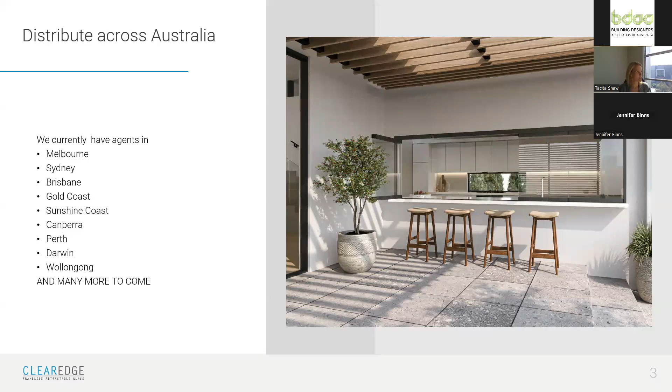So what is the ClearEdge frameless system? It's a frameless glass movable system suitable for both residential and commercial applications. It's made up of individual frameless panels, and each panel operates independently of the other.

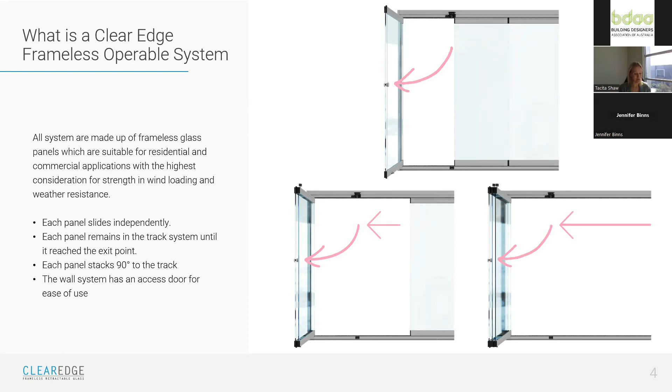The first panel swings open. This will be on the extreme left or right of the system, and this panel can be used as a standard access door if needed. Then the next panel slides along, remaining in the track until it reaches the exit point. It then pivots out and stacks at 90 degrees to the track.

The ClearEdge system is designed with the highest consideration for both strength in wind loading and weather resistance. Number one is our weather seal. It's made from a UV stable clear polymer, cleverly designed in an H shape with a soft inner lip. This holds to one panel while receiving the other in a tight seal.

Number two is interlocking end caps. Each panel has a female and male end cap which interlock, giving the system integral strength under wind load pressure. The glass is mechanically fitted, and number four, you can see our double rollers. Each panel is hung by two double rollers with sealed bearings.

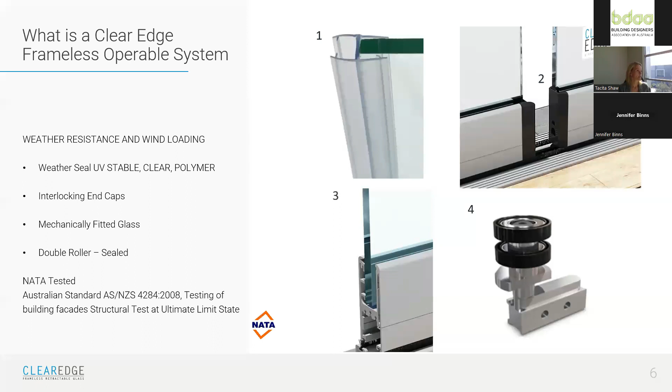So what product options do we have? Firstly, our standard system. The application is for residential outdoor enclosures, weather barriers, and low wind load areas. It utilizes 10mm toughened safety glass with a number of options within that range. The maximum height is 2.6 meters, the maximum width is unlimited, and each glass panel can be a maximum of 850 millimeters.

The next system is our premium system. It can be used as external and internal walls and doors, also as weather barriers on multi-story buildings, in commercial internal and external applications, and in high wind load areas. It utilises 12mm toughened safety glass, again with a range of options. The maximum height is 3 meters, width is unlimited, and panel width is about 850mm.

Finally, our ultimate system, used in cyclonic wind areas, on high-rise buildings, and in commercial internal and external applications. This uses a very thick 15mm toughened safety glass. The height can go up to 3.2 meters with unlimited width and about 800mm wide per panel.

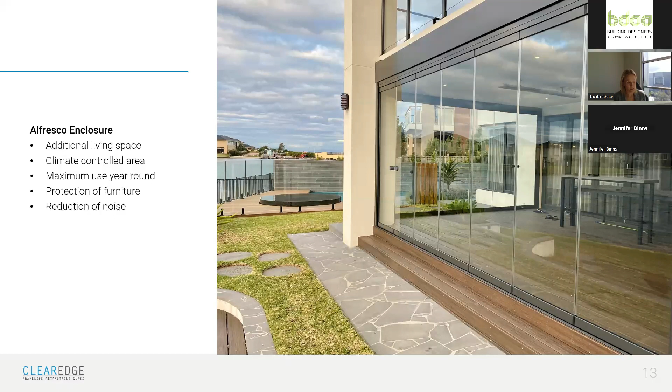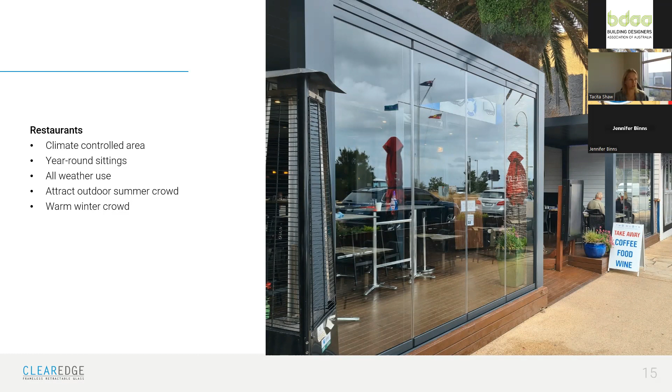Then the next is cafes and restaurants. This really gives the operator the ability to keep bums in seats, essentially. No matter what the weather, in all weather conditions, they can keep patrons at tables, which is really important. It also has the ability to keep the ambiance and an open feel, which is really key to restaurant owners.

And then the next way our product is used is in wall and door systems. It can be used as an internal room divider. This is a growing trend. We're actually seeing our product being used as a movable internal wall in boardrooms and offices to create multi-use spaces.

Then we can be used as external door systems in residential applications. However, with the 7-star ratings that are coming through in the industry, this has been phased out in new builds. However, I think it is worth mentioning that it is still very popular within the renovation market, as it allows fast modernization of homes, but also allows uninterrupted views and brings that openness and light into a home.

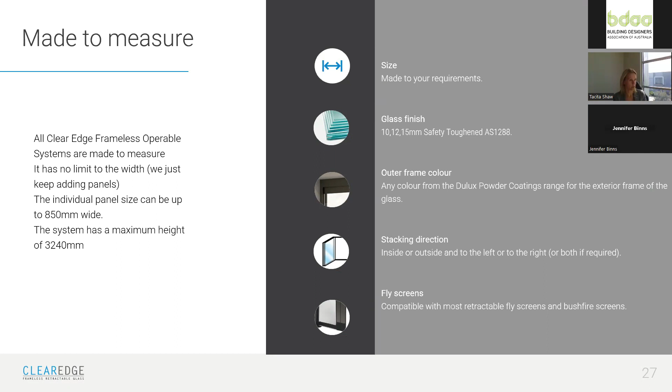Then we are fully compliant with all the regulations. One important topic I just want to touch on is non-compliant products being used within the building industry, and it's become a growing concern, especially in the glazing industry. Just last week, I attended a national conference with AGWA, which is the Australian Glass and Window Association governing body, where we addressed this very serious issue.

One way, if I can share, that a specifier can protect themselves is ensuring that the product's manufacturer or supplier are actually members of governing bodies such as AGWA, because this gives you protection. Being a part of AGWA means that we're held accountable to them, and we are committed to meeting the ever-changing Australian standards.

I think when we talk about non-compliance for us, the most critical aspect is the wind loading. The result of a non-compliant product can be catastrophic. If you just picture sheer glass panels weighing in excess of 80 kilograms failing in strong winds, the outcome can be disastrous. The building industry in Australia operates under very strict regulations regarding wind loading. Each building must comply and adhere to specific wind loadings and use products and materials accordingly.

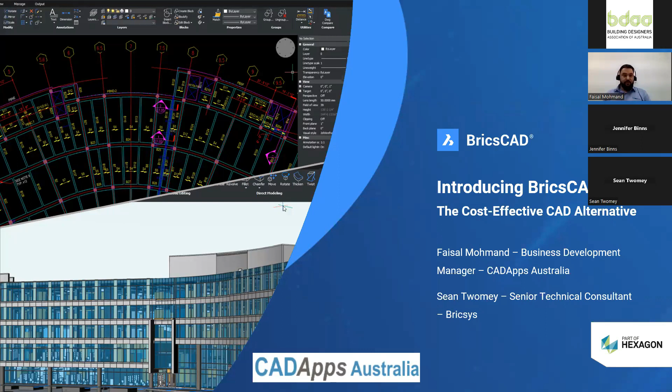So firstly, who is Bricsys? Bricsys provide a range of modern mainstream mechanical CAD, BIM, and collaboration products, which they offer under the brand of BricsCAD and Bricsys 24/7. The organizations who use the products are spread throughout the world and operate in many different industry sectors, primarily in building design, construction, manufacturing markets, and also civil and surveying.

Our approach is based on four guiding principles. We are customer focused and are known for our high level of support and approachability. We are also innovative, striving continuously to provide advanced productivity tools, which are often driven by the latest technologies such as artificial intelligence. Our products are cost effective, being less expensive to adopt compared to many products that are available on the market, and also offering multiple licensing options.

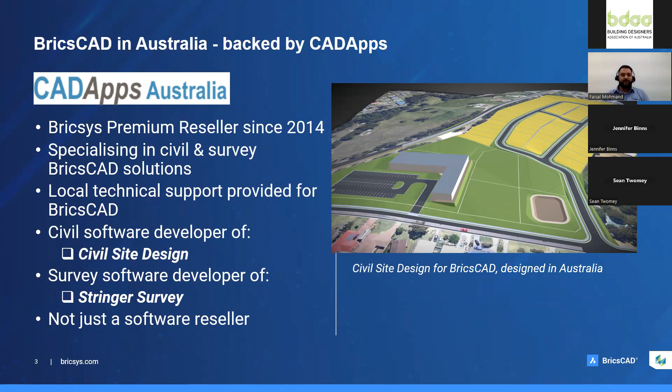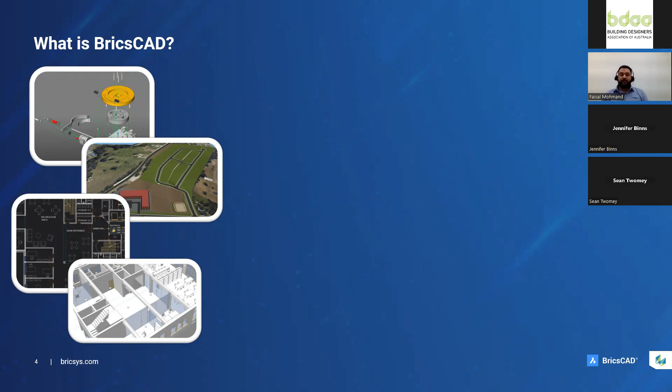So what is BricsCAD? BricsCAD is a fast and powerful design and drafting software. BricsCAD is a cost-effective alternative for businesses that need to create, view, edit, design, and produce accurate production documentation. BricsCAD's sole mission is to help our customers solve design problems faster. The variety of capability that we are going to talk about is really the key point that makes BricsCAD stand out. The lower cost of ownership, flexible licensing, the fact that BricsCAD is a native DWG solution, which is the industry standard data format, became available to clients who are using BricsCAD.

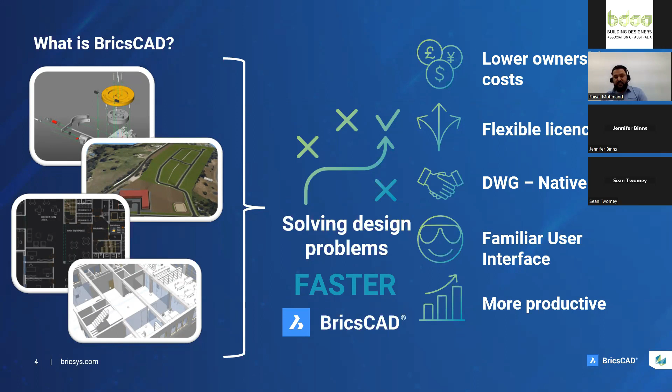Familiar user interface. So with BricsCAD, you're getting the best of both worlds. Basically, you're getting all these additional capabilities that you need wrapped up in a familiar user interface and data format, so that you can get started immediately once you've selected BricsCAD.

The licensing advantage of BricsCAD is that you choose the licensing model that's right for your business. Whether it's a perpetual license, you own the software for life, the lowest cost over time, and the majority of Australian businesses are choosing the perpetual license. BricsCAD also provides network licenses, which allow you to share a model which your users can use, whether they're expert or casual users. And BricsCAD has subscription options as well, 1 year and 3 year options.

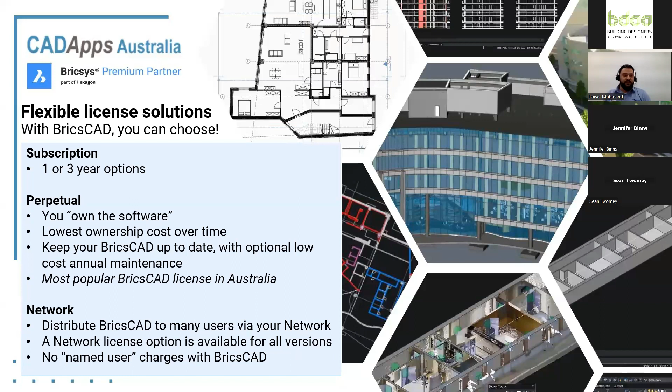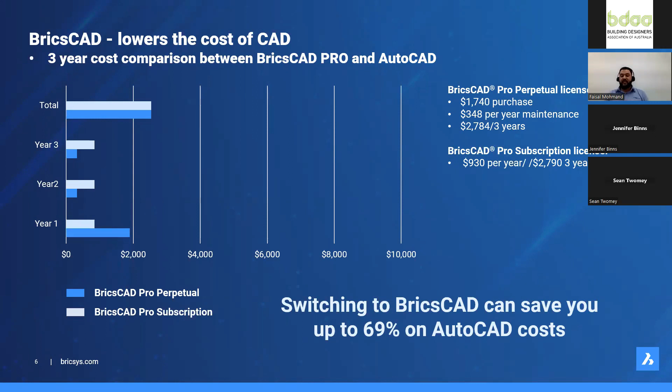On the topic of lower ownership cost, BricsCAD is considerably more affordable than many other products in the market. It's priced competitively, but also the flexibility of its licensing options can reduce the cost dramatically. For example, let's take BricsCAD Pro, which is the 3D modeling software. If you purchase BricsCAD Pro with a perpetual license, you'll see that over 3 years, due to the low maintenance cost, the cost of ownership is really attractive. But even using BricsCAD Pro as a subscription, the overall cost is kept to a minimum.

When we compare this to the cost of AutoCAD, we can really see how affordable BricsCAD Pro is. AutoCAD is only available on a subscription basis, and we can clearly see that whatever license type you select, BricsCAD is far more cost effective. Even after just 3 years, the total amount spent on AutoCAD is nearly 3 times as much as on BricsCAD Pro. And the fact that BricsCAD products are available in shareable network licenses makes the cost even more attractive. So just by switching to BricsCAD, you can save up to 69% of your CAD cost.

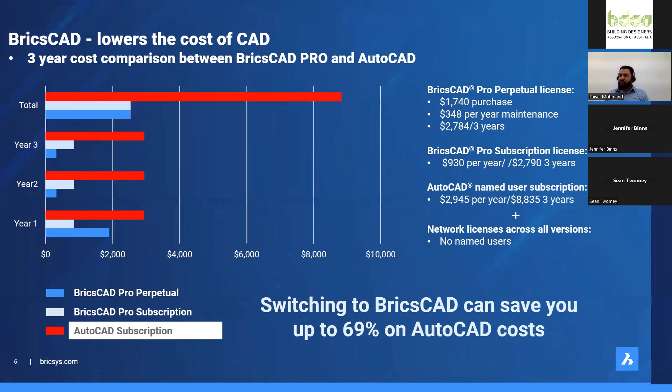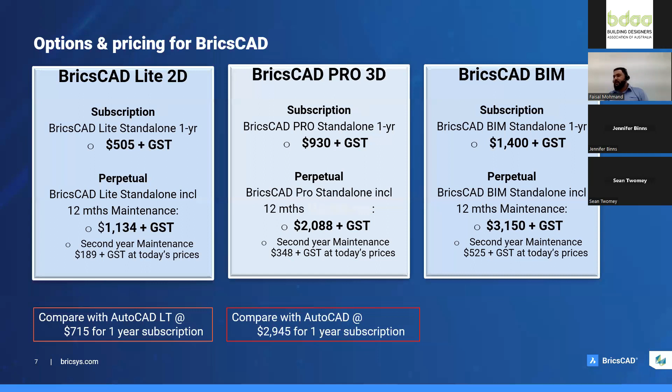Just to talk about a bit of numbers, obviously the prices are very important. BricsCAD Lite is our 2D drafting tool, which comes in subscription, perpetual, and also network. The subscription price starts at $505, and the perpetual standalone with 12-month maintenance comes in at $1,134. BricsCAD Pro, which is the 3D modeling software, 1 year subscription is at a very low price of $930. And if you choose to purchase the standalone perpetual license with 12-month maintenance, it comes at $2,088, which is far cheaper than the AutoCAD prices.

Hopefully, you've seen how BricsCAD Pro can provide a very different, unique approach to 2D and 3D design, whilst maintaining the familiarity and compatibility of a legacy DWG-based CAD product.

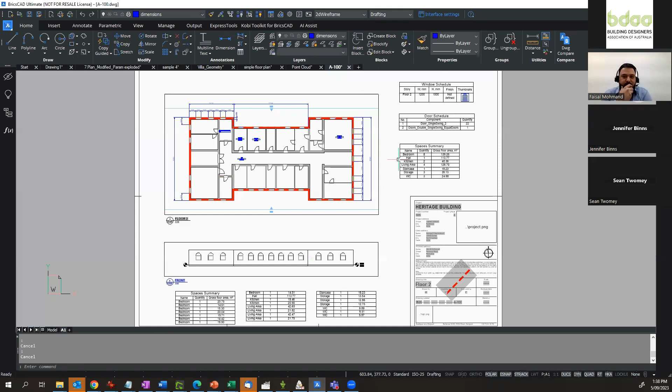Okay, thanks, guys. Normally, I like to show point clouds. We've got some very impressive features for scan to plan and scan to BIM. We won't get time for these today. I just want to mention that we have them. So if anybody's got interest in these areas, please let us know. We've got a bunch of webinars and recordings and everything else.

We will touch briefly on doing a bit of 3D work. And more importantly, we'll show how we generate that from a 2D floor plan. But before we go to any of those, let's just do some of the basics, because much as we like to live in this BIM world, a huge amount of the work that gets done is still done based off 2D plans. So as I mentioned, we work with the standard DWG format.

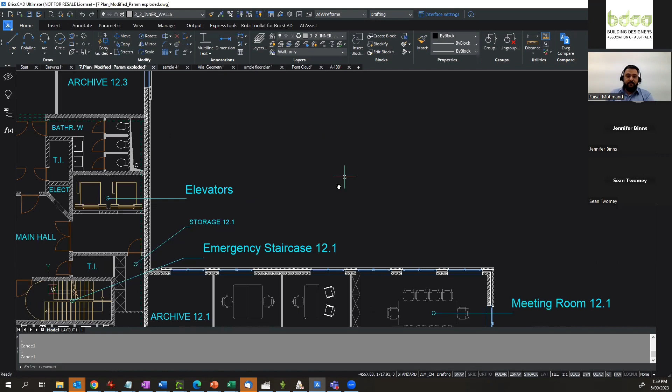So a lot of what we do is taking people's existing customizations into the BricsCAD interface. The reason for this is that when people start with the software, usually it just works for them. You type in the line command, you can draw your lines, everything works as you'd expect. So the question they ask is, okay, can I bring in my existing plotter configurations? We won't go into this now, but taking in the PC3 files and the pen assignments for color-based plotting, etc., we're very, very fluent with those.

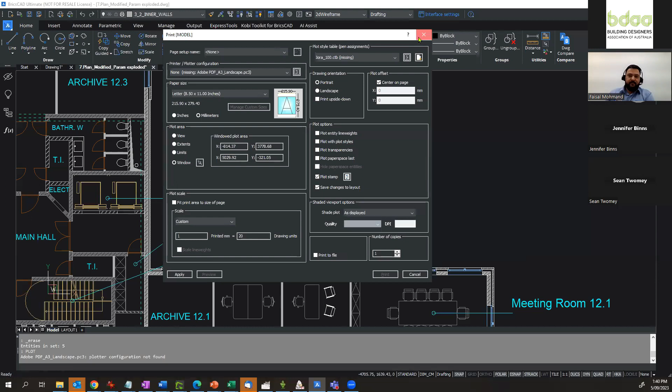We've got a full presentation on this where we talk about bringing in the ribbon files, tool palettes, the Lisps, sheet sets, etc. That gets a bit more detailed than today's presentation, but I want to just briefly mention the fact that we're happy to get there if you want to.

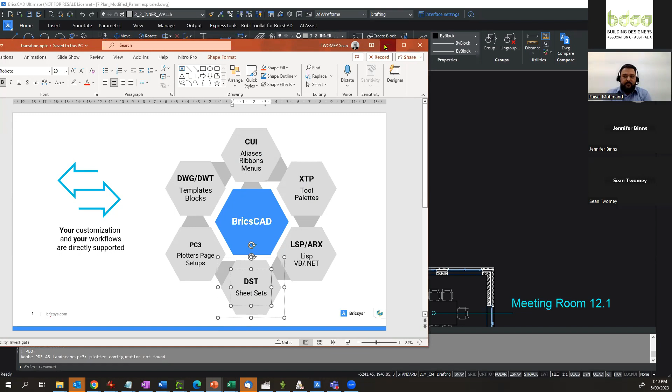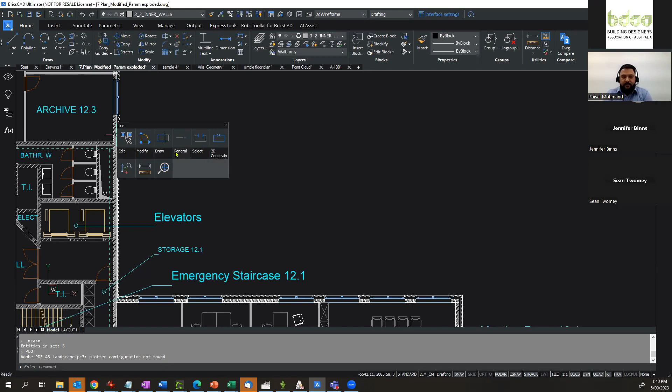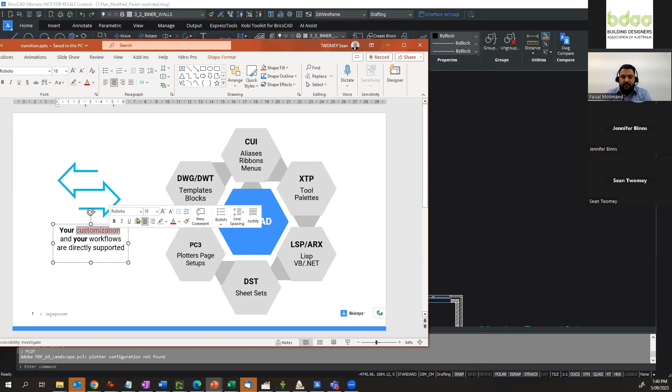In terms of how the software works, especially for people who are not fluent and familiar with CAD, one thing you'll find is that when you hover over an entity, you get a thing called the quad, which prompts you with a whole bunch of intuitive things that you need. Now, this I always compare to PowerPoint, because in here, for example, if you want to change the color of this text, you do it via this floating menu. The same thing happens with the quad. If I want to change the color of this text from cyan to red, when you hover over it, you get the option to do it here.

Now, because that's not in the other CAD packages, people often disable it. So down here in the bottom, you can, of course, turn that off. And now when you hover over it, you don't see it. You go to the properties menu and you change it from here instead. So it's the exact same process, but we tend to encourage folks to at least use the hover tooltips, but also the quad as well.

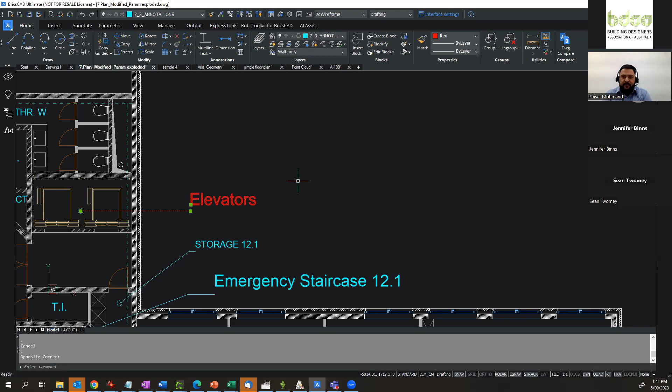So these are some of the less spectacular features in the software, but we call these quality of life features because these are the basic functions that keep you going throughout the day when you have to repeat them several thousand times. Some of the other features that are very useful in that sense are the copy guided and blockify features. In this case, this is obviously a building floor plan. These walls are comprised of a hatch pattern and a series of lines. So they're not intelligent objects, and this door opening is just a block.

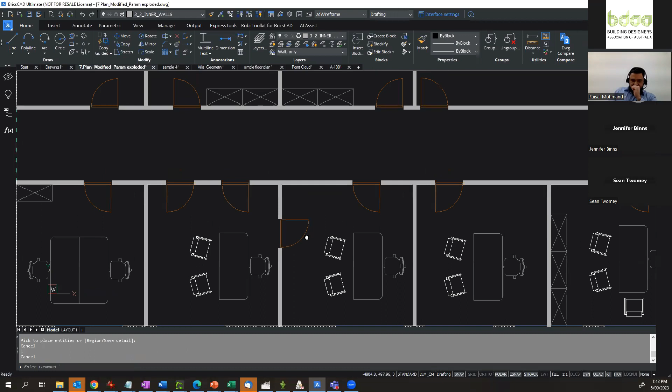So what I can do is type a command called copy guided, which is one of our most popular commands. If I type in copy guided here, when I select that door, you will see that the door becomes yellow and the surrounding walls become blue. That's telling us that it's going to copy the yellow entity and use the blue entities, i.e. the walls, as references. So that's quite nice. It also means that when I move to a different orientation, it will also copy them down here. So without having a fancy object-based model, working off basic 2D line work, you can get quite creative with this.

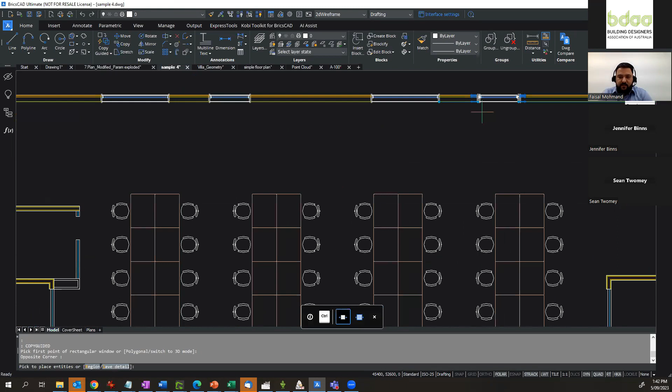So we've got another example here, which is a bit more challenging. You can see in here, it's got more elements to both the walls and the windows. So the exact same command, copy guided, same process. When you select these, you can move them around, and as you go to different orientations, you will see that the exact same process occurs. You'll also notice here that as I'm doing this, it's showing me the dimensions here. So what I could do is type in 420, to make it exactly 420 of this entity here.

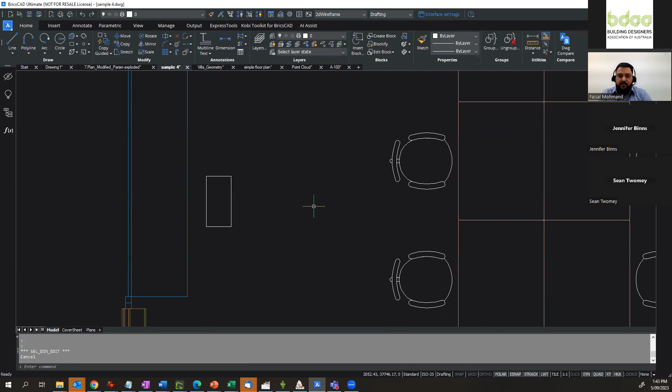That process works in general, where if I was to draw any type of entity here, if I pick this first and then select my rectangle here, I get the option to type in the dimension here. So it gives you parametric inputs without the complications of parametrics. So that's one of our key features, that copy guided feature. And we find that once people get used to that, they don't want to live without it.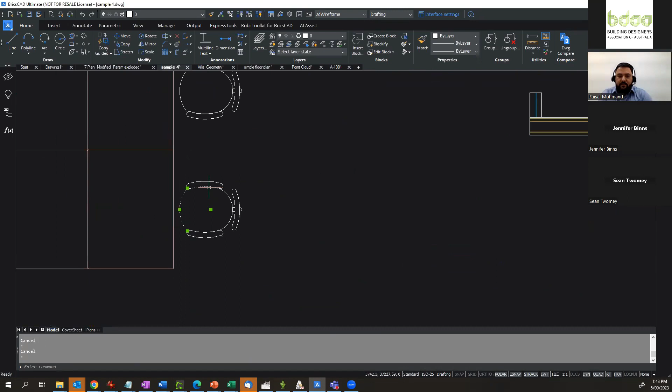One of the other features that people like to use a lot is our blockify command. In this case, this geometry has either been drafted or imported from PDF, and all of these chairs are drawn as individual segments, which is a very inefficient way of operating. So what we want to do is convert this to a block, have it find all other instances of this within the drawing, and make blocks from those as well.

So to achieve that, we type in the command blockify. Incidentally, I'm typing in the commands because I am from that vintage. These also exist up here on the ribbon, but I don't know where they are because I never use it. I always just type them in, but of course you can use the ribbon as well if you prefer.

On the blockify option, you can see here I get a few options on the panel on the right hand side. I'm going to search the entire drawing, use a default block name, pick my own insertion point, and actually pick my own block name as well. If this was imported from a PDF file where the geometry wasn't 100% accurate, you can give a tolerance factor here so it's got a little bit of leeway.

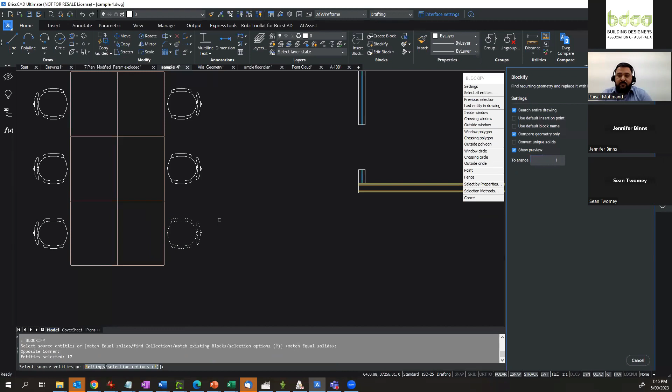In my case, I will grab one of these chair definitions and press enter. So it's searching the entire drawing. There's quite a few here, so it has to work for a while. And then it's telling me, okay, I've got the automatic block name and automatic insertion point. So what it's now done is inserted that for each of these definitions.

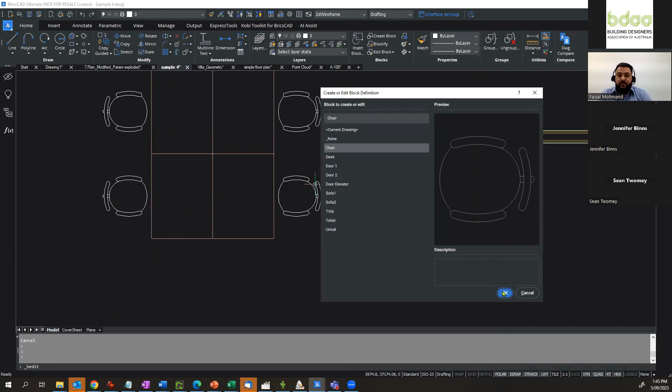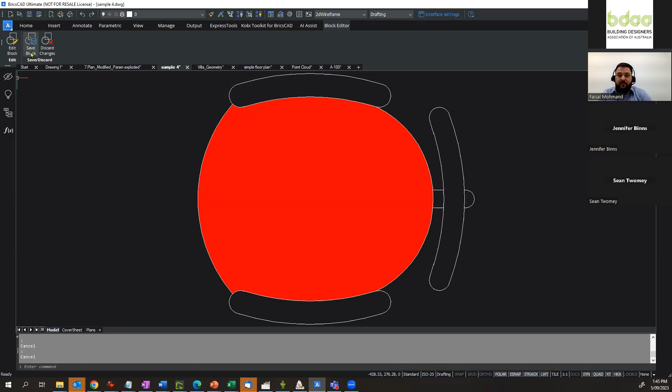What that means is that if I go in here and open that one, let's just do something really simple. Let's put a hatch pattern in this. I'll make it, say, solid, and select a point in here. And I'll make that red so it really stands out. When I now save this, you can see that all these blocks have been updated together.

So, I think I skipped a step there, so let me just go over that quickly again. In this case, these sinks have also not been done correctly. So if I type in the command again, blockify, I will again select these entities here, and if I select compare, okay.

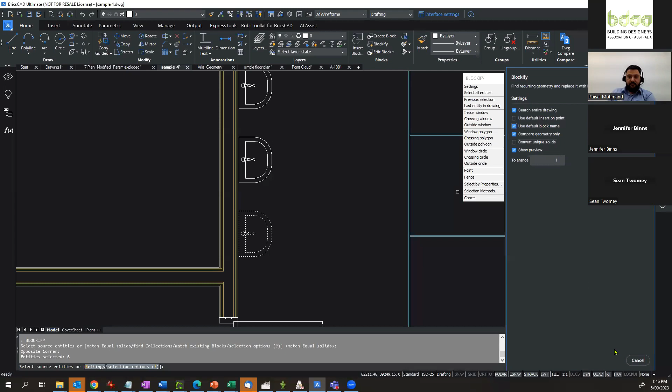There we go. When I press enter, once again you can see here that it's giving me the option to tick on and tick off which ones I want to use. So if I wanted to, I could untick this one or tick it on and off. So you get interactive options, you click on which entities to use and also which insertion points.

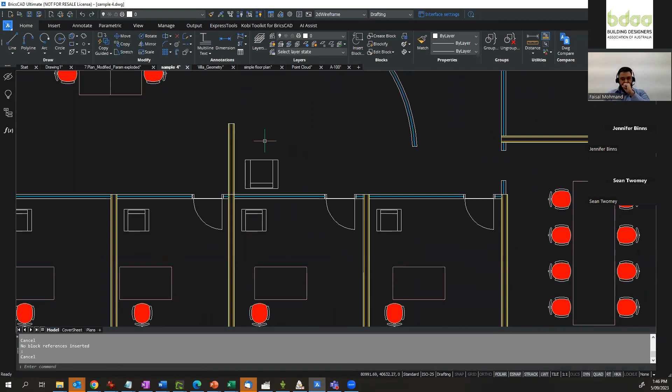One other thing to point out very quickly on that copy guided command - we did it earlier by clicking on an entity and referring to some very obvious straight line elements that were next to it. If I was to copy this armchair...

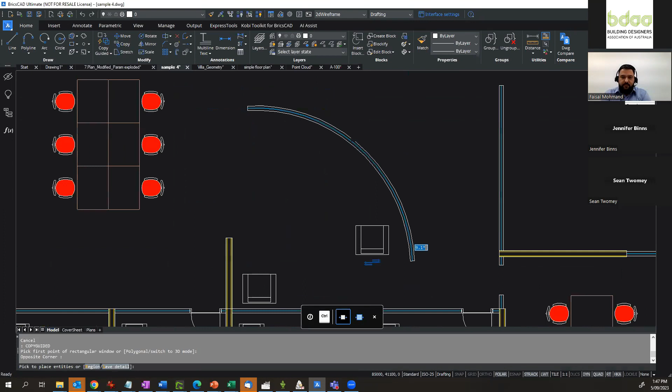Using my copy guided command, same process, I'll copy it here. When I move to a curved area, it will go and work and just rationalize the tangency of that area for me as well. Also, if my walls were of varying thicknesses, what I could do here is when I run the command, I could copy it but just click on the front ply of the wall as opposed to the entire wall. So you can get very careful and clever in terms of how you go about this.

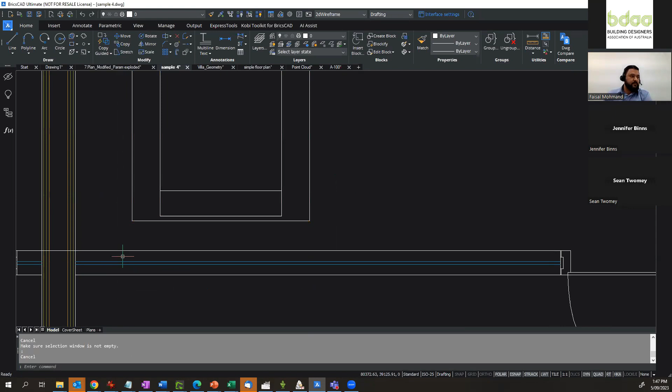And we've got full web sessions on scenarios on this, and we can even use parametric blocks and have more intricate examples happen. But the point I want to emphasize here is that when you open BricsCAD for the very first time, as long as you're aware of these commands, copy guided and blockify, they tend to work straight away. You just access them and work through those.

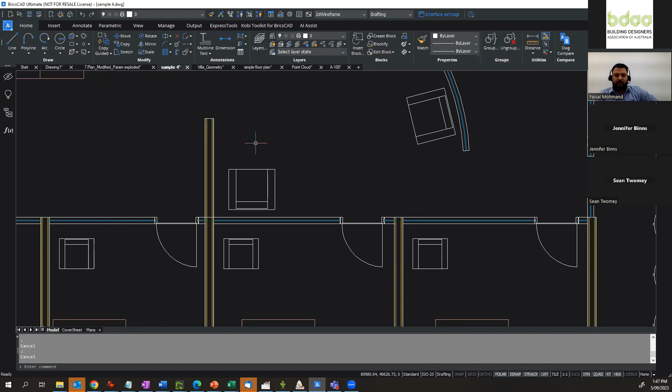So I'm obviously assuming that everyone is happy with the fact that we've got the standard lines and circles and dimensions and all these usual fundamentals that you would expect to see. Very happy to go over any of these in more detail. Get in touch with Faisal, and his guys are very happy to go through it as well as myself.

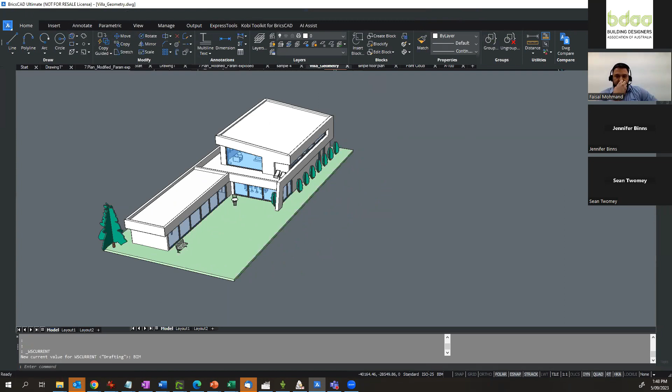Just while we've got a few more minutes left, I want to quickly touch on the 3D side. Because BricsCAD is a newer package and doesn't have a legacy of very old code slowing it down, when you go into a 3D environment, let me switch from drafting into a BIM environment. As you start working with solid shapes and general areas, it tends to be extremely quick, a lot quicker than people expect.

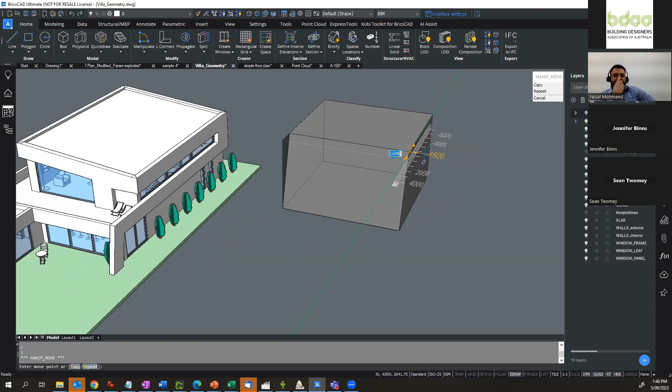Which is why point clouds tend to work so well. So if I draw a standard box here, if I hover over one of the faces, I can push pull. If I hover over one of these lines, I can push pull that. And as I've got dynamic UCS turned on, if I draw some kind of shape here, I can have it snap onto the front of this and work on various facades.

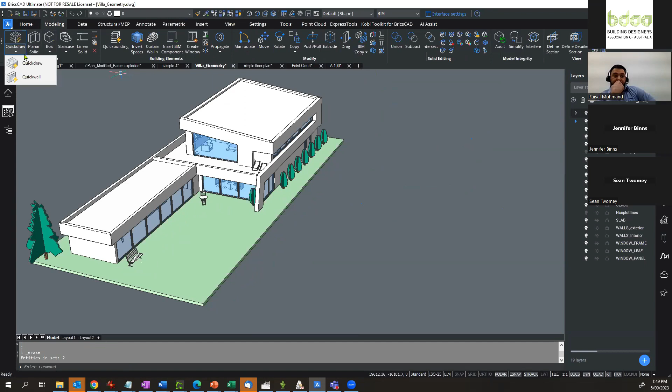So what you would normally do is go and create a very aesthetic element like this villa. If you don't have time to do these very creative versions, there's also an option here which we like to show quite a lot. It's called quick draw. We've got a quick draw command and a quick wall command.

When you run quick draw, it's going to sketch a basic building shell for us. It's just drawing slabs and walls according to these thicknesses. What's quite clever is that as you draw from the inside out, it will trim the entities on the exterior walls. As you draw from the outside in, it will do something different.

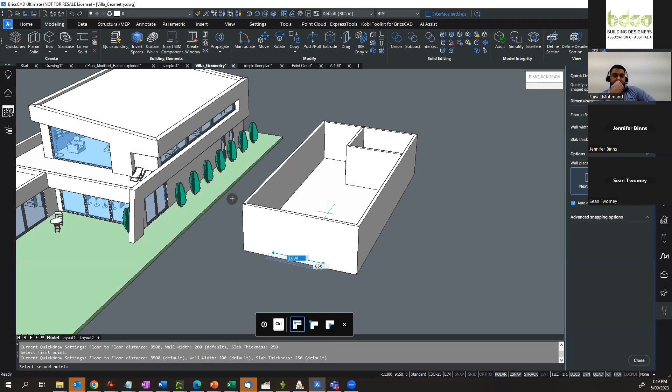So let me repeat that command, drawing from the inside out. This time I hover close to the wall. If I move my view over to here, you'll see when I hover next to the wall how it turns red, so it's now going to create a cut in that wall.

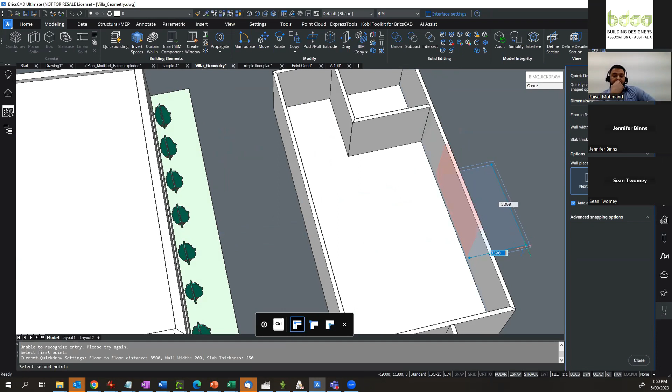And if I do the same thing from the outside in, you'll see how it will actually recess that wall in. So you can start with a very basic scenario and very quickly add all kinds of alcoves and creative elements to it.

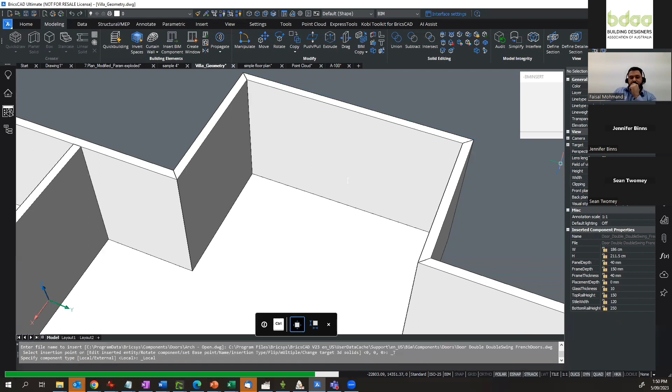And what you would then do is use our library to add various kinds of doors and windows and whatever we need. As you place these in here, you get the options to snap or use various offsets as needed, so we can place these wherever we need.

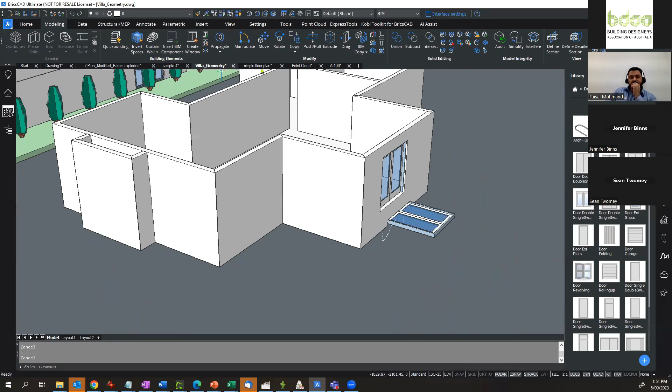The last thing I'll show very quickly is how to take a 2D drawing and turn that into a 3D environment. Here we have a file named Simple Floor Plan, which is exactly what it is: a basic series of 2D lines representing a standard looking floor plan. When we run the quick draw command, you'll see there's an option called auto adopt sizes, which works in a similar fashion with point clouds.

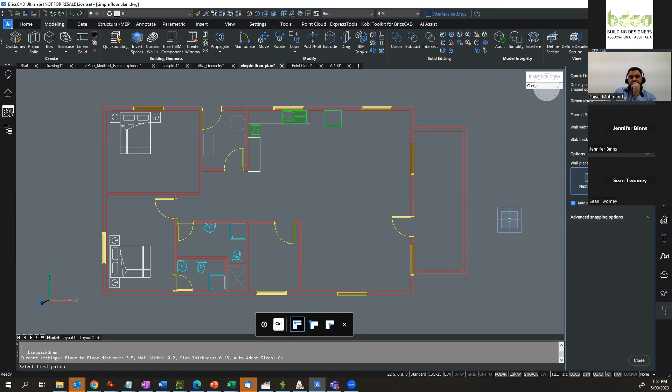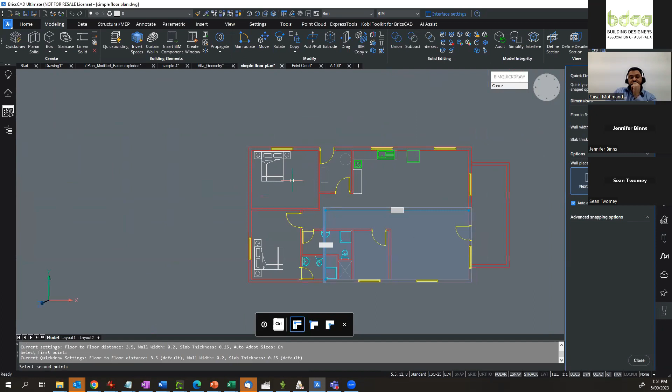So what happens here is when I hover over this corner, you'll see how the cursor is adopting the size of that wall for me. When I move down to here, let me do it again so it's even easier to see. You can see it's picked the exact thicknesses of these walls, and as I go up to here, you can suddenly have the outside of your building footprint drawn in.

You can move to a 3D view if you prefer. Now you can do this scenario where you hover over the internal walls like this, and as long as you draw outside, it will trim them for you. You can quickly run through those.

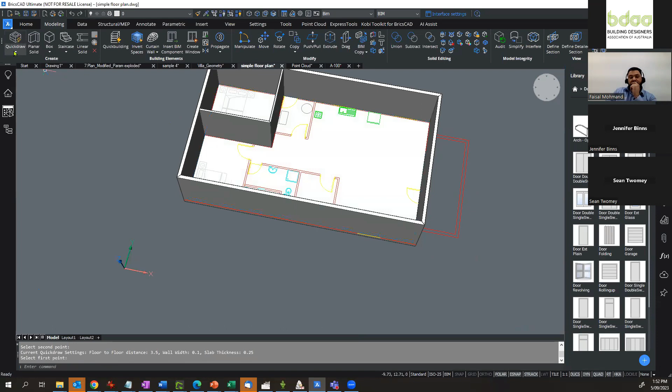Or what you can do is use the quick wall tool. With the quick wall tool, you draw a representative sample of each wall. So we can just put a few of these in here. I think I missed my snap here, but that's okay.

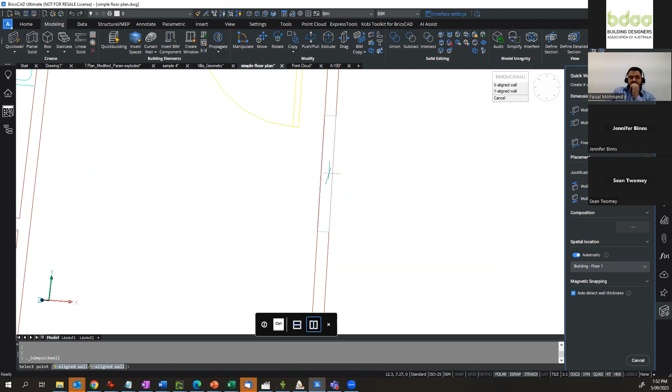Here we go. After you've drawn these, you can hover over them and click on, for example, L-Connect, and have these walls join up. When they join, you can cycle through the different options for how the corners meet up, so you can have trimmed off or the miter. The miter is the one you usually want.

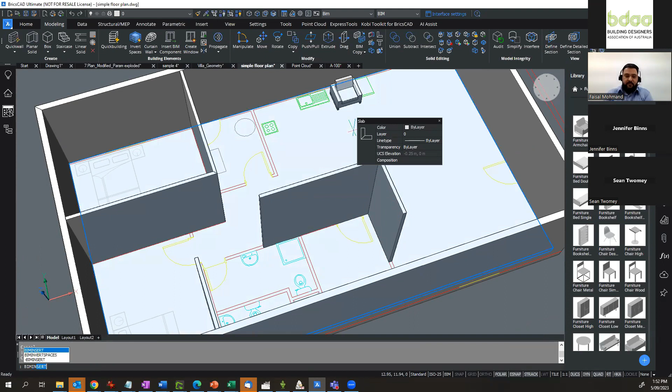You can see how you would quickly run through this and create the internal walls. We've got libraries as well as doors, and libraries of furnishing elements too, so you could click on the relevant type of armchairs and everything else you need. If you type in BIM insert, you can insert a bunch of different file formats, including Revit families.

So what we have here are a bunch of IKEA families for elements. If we click on, say, this table and five chairs, that will place that in here for me. So as you do this and expand from a 2D environment very quickly into a 3D environment in the exact same interface, you can also bring in these Revit families.

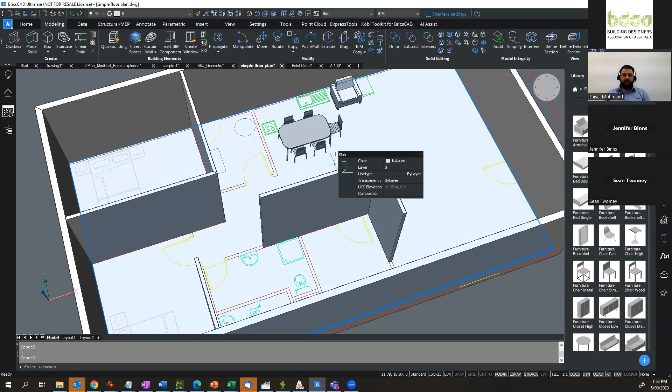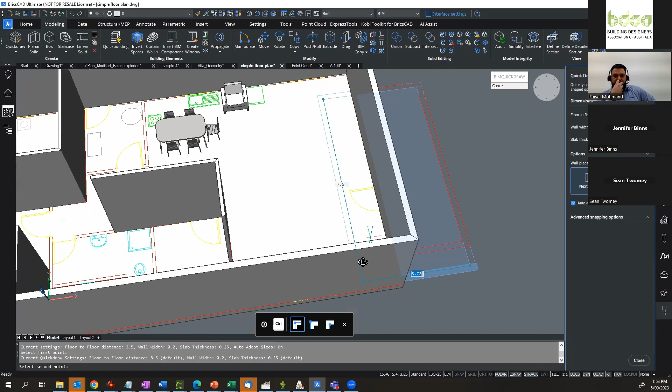Last thing I'll show, because I want to leave some time for questions, is what I mentioned earlier with going from the inside out and the outside in. For this balcony here, for example, if I go back to my quick draw command, let's first do drawing from the outside in. You can just draw yourself a balcony here - sorry, let me zoom across here - and have that showing up as a basic set of geometry.

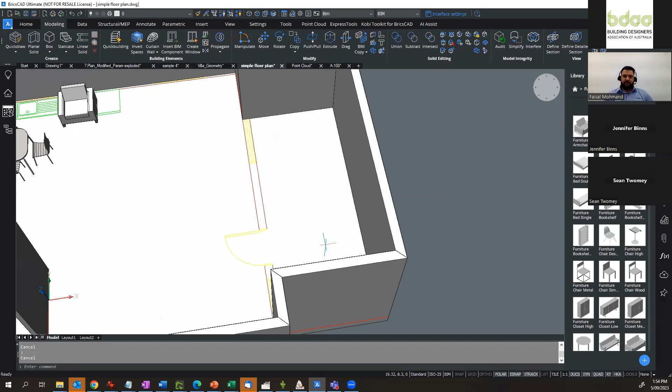Let's just do a few variations on that. If I was to draw that the other way around, I would actually trim my wall here. I could then put a glass facade in here, whatever I needed. Having done that, let's grab this option here and switch this to a view like this. I won't do all of this, but let me grab a few of these faces and click on push pull and lower those down to the wall height that I need.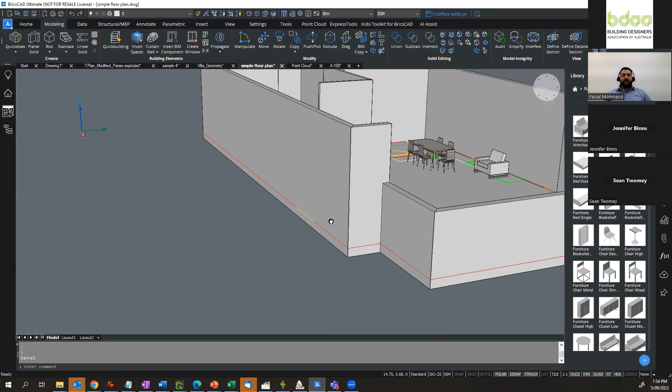So you can see how you can take that basic 2D sketch and very quickly turn it into a model, which can then be exported into IFC if you need. If you go to the export option, that can be put into IFC or used just for illustration purposes.

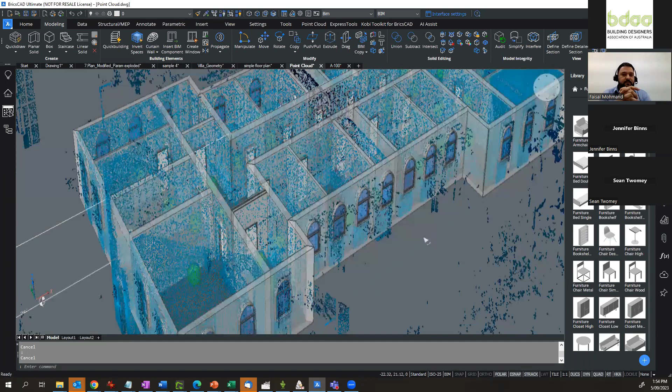The thing I would like to show you on a different presentation, because it would take more time, is how we do that with a point cloud. In this case, the point cloud has been put through a very similar process. Then using our sheet sets, that gives us the ability to produce these floor plans, complete with schedule.

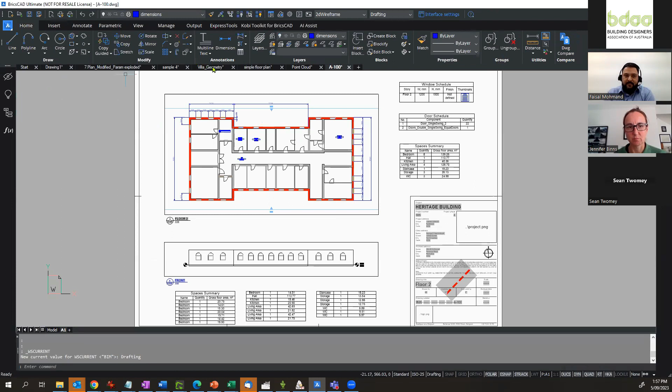So Pro, if I go back to my drafting workspace here, Pro is basically using solid entities. It's using your lines, arcs, and circles, or even your solid geometries. So in this case, this villa has been drawn as a series of solid shapes. That can be done in Pro.

What you can do in BIM, if I go back to the BIM option, first of all, there's more automated tools for doing things like walls and versions like that, but I can also classify these as BIM entities. So if I hover over this here, I can now click on BIM and say I want to classify that as a wall. So in terms of working with large projects and general BIM standards, that's what that's about.

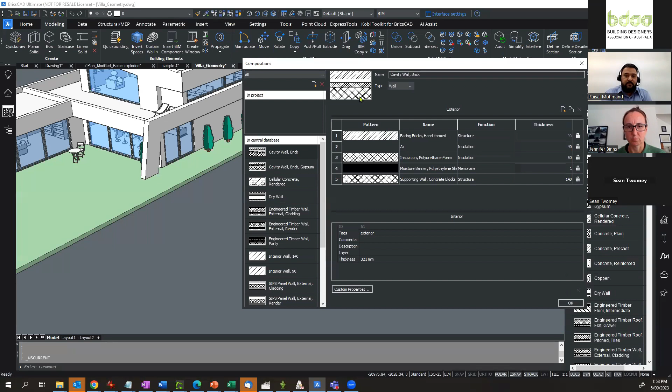You will also see that in the BIM option, there's a whole bunch of tools for modeling walls. And if I go in here, I'll be quick here. If I go to one of these walls, you'll see here that you have the option to build walls with various cavities and thicknesses across them. So it's more detailed. We're doing more than just basic geometry, effectively.

Sure. I'm going to keep pushing through the questions because we're running short on time and people might have to go. Ludovich has asked, are there any data or information losses when transitioning between AutoCAD and BricsCAD and vice versa? And are you able to collaborate with someone who uses AutoCAD and regularly exchange files with them?

Yeah, so you can definitely collaborate. And the information, so DWG is kind of like PDF, it's an open file format. So all the geometry in a DWG can be read by any package that subscribes to it. So information travels forward and backwards seamlessly.

Sam has asked, can we see price comparisons again, or are these on your website? I think they are, or Faisal will be happy to send you those details too. If you search online, you'll find them, but I think CADOPS has done a very good job of promoting that.

Okay. Adam has asked, how much training is required and what is the cost of training, and do you have framing plans available? So CADOPS have got a very extensive training network. If you know other CAD packages, you tend to get pretty intuitively through this.

What CADOPS have is specialists who are very good at transferring customizations, because usually the basic software just works naturally. But if people have spent time customizing user interfaces and Lisp routines and .NET and everything else, those can be ported across. It just takes a little bit of expertise, and CADOPS have the expertise for that.

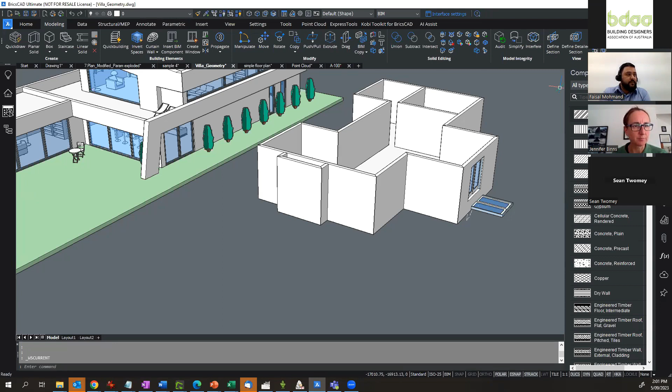Revit's a very popular package, so people always ask what we can do with Revit. I mean, we do a very similar thing. My very honest view of this is that if this package had been out just when Revit was coming out, it would have been a very interesting kind of a scenario. In terms of what it produces, it does all the same things. Revit's a very mature package, a very mature user base, so we wouldn't necessarily have quite that many users out there, but functionality-wise, we tend to do a very, very similar workflow. But I haven't done a comparison per se.

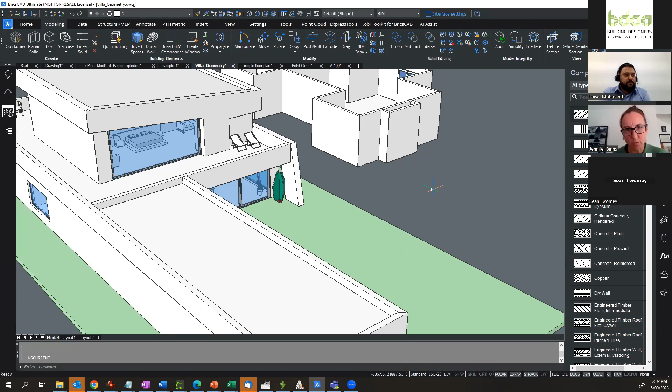Just reading another one of Shelley's questions: in Revit, you can change the visibility display in terms of the level of detail that you're showing in walling when you're in plan view. You have that same? Yeah, so you can. I can show you if you want here, but in this case, this is a basic wall. If I wanted to, I could show that wall as a version like this, where you have all these details coming in. So if that's what you mean, that can be done.

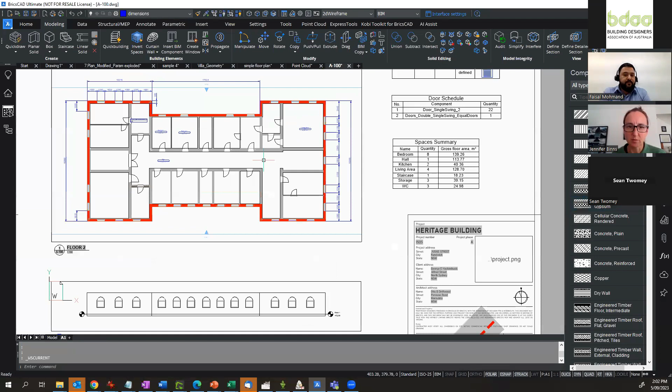Yes. Also, on the plotting side of it, in this case, I've got different levels of detail turned on this sheet here. So if I wanted to go to my properties and change that, I won't do it here. I'll just point out that I have options to change it to the different levels of detail here as well.

Now, look, if you compare two packages, you will always find things that one does that the other one doesn't do. So I don't want to say we do everything that Revit does. That's a more complex beast. We certainly can do the AutoCAD functionality very, very easily. We do plenty of BIM as well, but we're not trying to say that you can jump from Revit across to this in one hit. AutoCAD's a much, much easier path.

So Erica has asked what version of Revit can be imported? The latest version? It's either the latest version or one behind. It depends on which version is being uploaded to the Open Design Alliance. So we can import Revit. On this version, we don't have the ability to export it just yet. So we can certainly import the files.

And one last question, how well does the program handle the ease of detailing working drawings, which is sometimes a criticism of some of the others? Okay. Well, look, that's probably one of the advantages because we are in the CAD environment, so you can just go and use all the CAD tools for that.

Look, the Revit discussion is a complex one because there are very passionate users who've got a lot of very serious work, so we're careful in how we answer those. But the detailing side, we're quite confident with. The full documentation is a thing that we'd have to just discuss in more detail in terms of what people need.